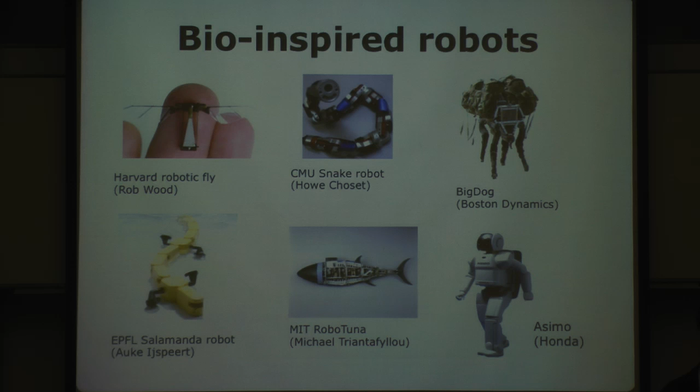As you can see, many different exciting robots are out there, developed for many different domains. What I'm wondering, though, is every robot has their own applications and features and all that, but what I'm questioning is how do they even design or get to that point? As a spectator you think, wow, that looks like a fly, that looks like a snake, that looks like a dog. Well, that's not really how bio-inspired robots happen, right? I want to make something that looks like a cockroach and make it look like a cockroach—that's not really what's happening.

So I'm diving into the deep philosophical side of the design process of how we actually do this. In order to do that, you have to understand the biology and the mechanical system. I'm not going to talk about all the biological stuff, but the one thing I want to talk about is: we look at a cheetah and think, wow, that must be designed for running really fast. I'm looking at every single detail—these black dots are probably good for running.

If you think about it, this design solution, going through millions of years of evolution, needed to evolve to satisfy many different constraints or requirements. Look at it like a physiological constraint—they need to keep their temperature right, they need to reproduce. Well, it would be great if I had a robot that reproduces itself, but that's not exactly what I'm looking for right now. And environment—they have to weather rain and snow, and they need to eat, digestion. You know, how much weight do we actually have just for the digestion organ.

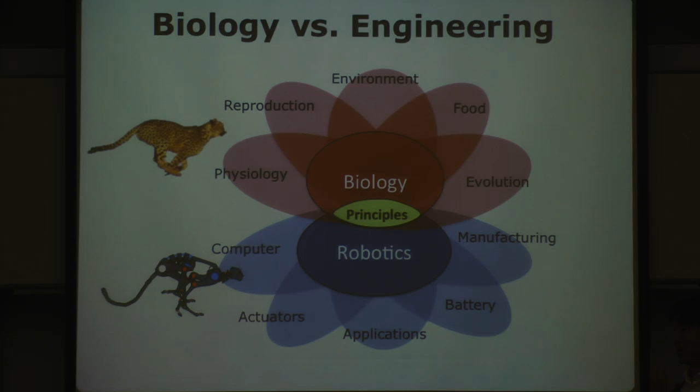So in order to really learn effectively, to use in our environment for an engineering purpose, you need to find that common principle, the physical expression that describes the behavior, and then we can learn much more effectively.

So that's the core idea, and this is the diagram I've been using. I'm going to briefly introduce it. If you want to make a robot or some mechanical system, you should have some sort of goal, and then following those objectives, we design it.

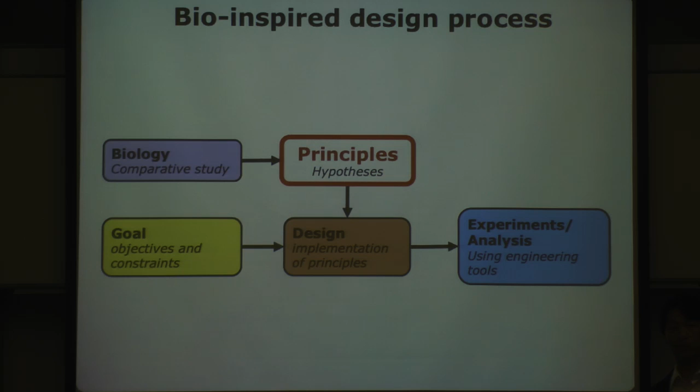Can biology play a role? I already introduced the complexity. It's not that simple. You have to go through an extracting principle process—that's the most important part of the talk—and usually those principles are extracted through hypothesizing and then doing some process I'm going to show you later.

And then you can design it, experiment, and analyze the system. For example, if you want to make a running robot, you have to look at many different running animals.

Why? Because I'm making a running robot. Cheetah is not the only animal that runs. Cockroach runs very differently. So you can get the gist of running—that is, the principle of running. Maybe this is not the only one, but this is one of them we know.

A SLIP model. This abstract representation allows us to recreate, to re-embody that philosophical abstract representation into our domain. That turns out to be very different from the animal because we go through this principle process.

And then we can measure their body center of mass trajectory and the ground reaction force, and see if our hypothesis really is valid for that behavior or not. Sometimes true, sometimes not—so you can revisit your hypothesis and refine it.

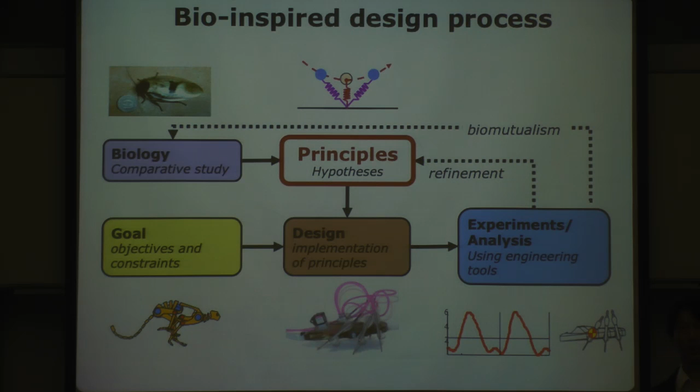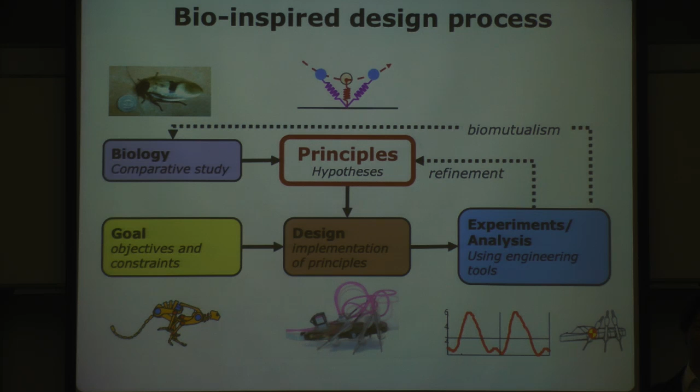Sometimes, this process is so much fun for me, especially because it actually sometimes inspires biologists. For example, Bob Full introduced in the TED Talk how engineers use a tail in a climbing robot, and biologists, who hadn't looked at it before, started looking at the tail function in the animal. They started publishing in Nature and all that. So there's some mutual inspiration going on—that's a very interesting point.

So as I explained, this complexity between these two domains—how to create a filter so you can put it through this filter and get the principle out. This is a process we're developing right now.

Not everything is structured, because I believe humans cannot be replaced by computers. Some things, computers will help with—analyzing—but I think humans still come in for understanding, finding that something is interesting, and finding that principle. So you hypothesize, simplify it into a certain model, do a lot of experiments with numerical simulation or robots, get all the data, look at it, and then you can get those principles.

So we're trying to more and more formalize this. We're writing one paper about it, and still some part is structured, some part is not. So this is the thing we're talking about.

There are many legged robotics—many people are probably familiar with the SLIP model—but this is one very good example of the principle we're seeking. The spring-loaded inverted pendulum: imagine a point mass on a spring leg hitting the ground and then jumping off.

That simple dynamical representation represents many different symmetrical running gaits, and that helps us a lot in understanding what running really is. Instead of looking at all this complex degree of freedom and measuring all the detail, we can understand it much better physically. So I want to show you a couple of examples.

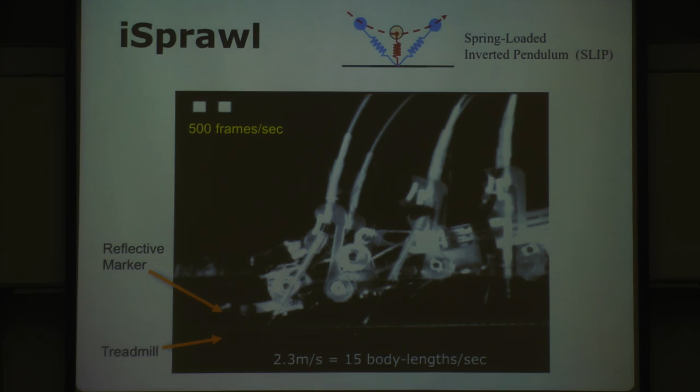This is one of the robots I first worked on, called iSprawl. We learned from the cockroach, studied it a lot, and got several principles. We implemented it, and in the end it turned out to be very different.

That's why we call this inspiration—there's no mimicry really happening. Sometimes even though you try, it doesn't work. If you want to see it at real speed, this is from about 2004. It's pretty old now, almost a 10-year-old robot.

So it does just one thing well, because that's the thing we're trying to understand. When we designed this robot, I didn't look at how the cockroach climbs or eats—we only looked at running. So we abstracted that out and implemented it in the hardware, which is why it only does running.

And then Dan Goldman took this and asked, can I try it in the sand? No, it's not going to work because it doesn't have feet. And that's how we actually got the motivation—we need to study sand.

So it actually became one of the bad examples of bad design of the foot. That actually allows us to design this robot that fast, because the legs are so thin.

Another example, this might be my favorite. I got to work on gecko adhesives. This is the best example that shows how biology provided a new perspective. It completely changed my definition of stickiness. When I think of stickiness, it's always like, oh, there's a sticky material, why is it sticky. But actually, that allows change. No, stickiness is not material property, not necessarily. It's actually the overall effective stiffness that matters.

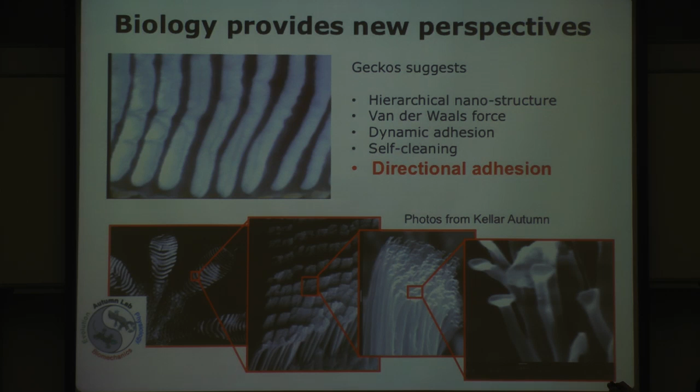There's a lot more going on. It doesn't get dirty, ironically. And it sticks while it's dragging along. That's also counterintuitive - if it's magnetic, yeah, that's fine, but what if it's sticky? You're sliding and it still sticks.

Finally, directional adhesion is another thing we found very counterintuitive and very effective for climbing. That's how we got the climbing robot working. This is data from Kellar Autumn - he dragged a seta and rubbed it against a surface, and there's a lot of adhesion. If you do the opposite way, there's almost no adhesion. That was a very important principle we had to learn from gecko.

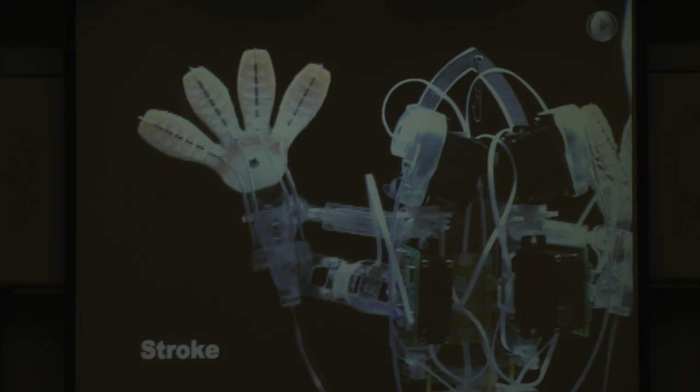So this was 2006, this was my major PhD work. There's a lot of fingers that look like a gecko - I think that was just more of a mechanical design aspect. But the most important thing in StickyBot is actually the principles for climbing, which we talked about in the paper. I want to just talk about the directionality side.

This is a real gecko seta, and it comes out at 45 degrees and then curves in. The tips of these nanoscale hairs are also aligned at an angle. Our hypothesis was this angle probably provides this directionality, because if you drag along, it can conform. If you remove that force, they want to come back, so they detach by themselves. So how can we create that principle alone?

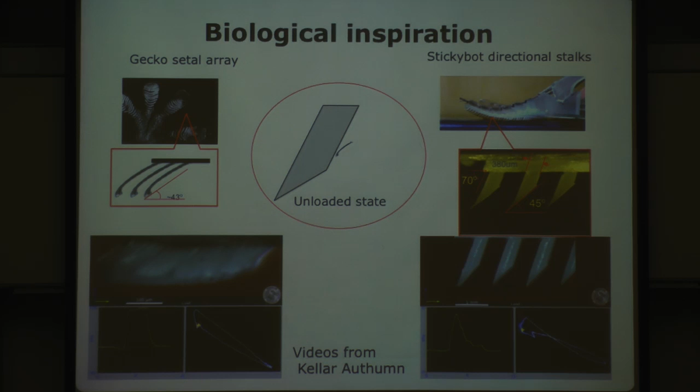We created a much simpler, much bigger, cruder version of our hair. If you look at real scale, it's actually worse than this - our hairs are about 100 to 1,000 times bigger. This video will show a real gecko versus our hair. Real geckos slide and still maintain adhesion; ours cannot, because ours are too big and attach, the frequency isn't fast enough, we have too much hysteresis. But the idea is, again, a good example of how we create similar behavior by abstracting the principle and creating the right effective stiffness to achieve adhesion.

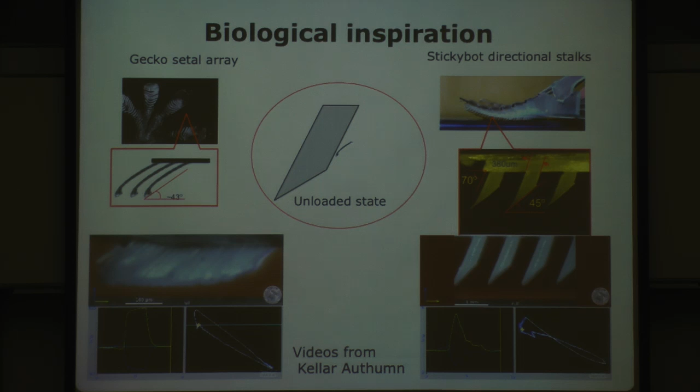This is a very old demonstration video showing what I mean by directionality. You don't need to push hard, which is important for climbing. Once you take out the tangential forces, it comes off - you don't need to peel it off like with regular carpet tape. It doesn't stick unless you apply pressure, that's why it's called pressure-sensitive adhesive, and then you need a lot of force to detach. Our tape doesn't need that, and it doesn't work the other way. That's all about stress concentration in mechanical materials mechanics.

That's still a hypothesis because we couldn't even prove it. Now we try a little more - 7 kilogram aluminum. I was a little careful, you don't need to push hard, but I was scared because if I dropped it, it might fall on my feet. But look at this - our glass isn't even moving, you can see the reflections stay perfectly the same when I'm taking it off, because the detachment force becomes really zero even though it's holding.

Kellar Autumn, the gecko guy who studied all this, got excited and asked, can I bring my daughter and hang her? He actually asked me, can I be hung? I said no, you're too heavy, the glass might shatter. But again, once she's up, because the adhesion force is proportional to tangential force, I can just take her out with my pinky, or blow air and it can come off. So it changed the complete concept of what adhesive means.

This is another small example I just showed you because it's fun. We had a squishy robot project, and I looked at the muscle structure where earthworms squish in the radial direction, then extend longitudinally. The longitudinal muscle contracts, and you can expand radially.

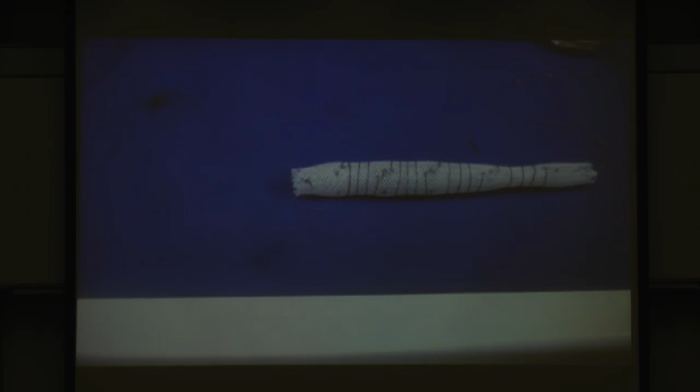So we put together a similar kind of structure, not using incompressible fluid, but using a mesh like the kind used in cable management. We made an SMA-based soft robot. It was fun, and it demonstrates that we can actually make soft systems with no mechanical rigid component that breaks upon impact.

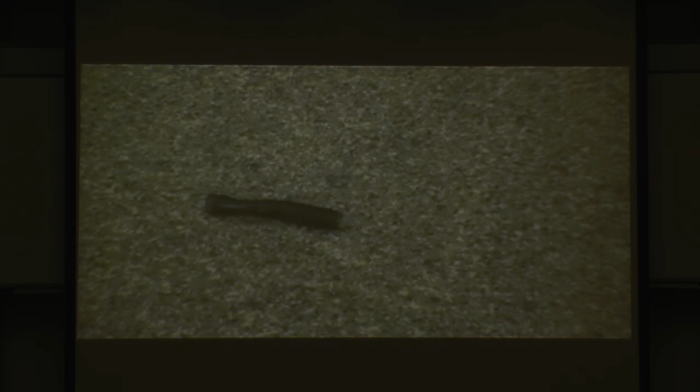Everything is made of fiber except the electronics. Some people ask, why are your electronics so strong? Well, those are just PCB and silicon. My student was crushing it, and it still works, because nothing really breaks.

Anyway, I think we'll move on because there's a lot to talk about. The final topic is Cheetah, obviously, so the rest of my talk will be all about Cheetah. This video, every time I give this talk, I have to watch it, but it still excites me. The gazelle is like a background animal. They're similar size, they're both mammals, yet somehow very different.

This video, I think, drew a lot of people's attention. I've been showing it for about 4 years. This is the only video available in the world, so there's no data we can collect, and a lot of hypotheses have been thrown into this.

Why do they whip the tail when changing direction? A lot of people say the tail's probably helping balance. I'm not really sure I'd call that balancing. That's actually about how to fall as fast as possible, how to change direction as fast as possible.

This is another impressive video, where a cheetah hunts an animal bigger than itself, tumbles it over, and is now happy. If you make a robot like that, I'd probably start from scratch rather than adapt something existing.

If you make a very dynamic robot, you have to really think about many things. You have to make it light, powerful, and robust. It's a daunting task. We started back in 2009. I began drawing in SolidWorks, and our goal was fast galloping, energy-efficient locomotion, turning, and jumping.

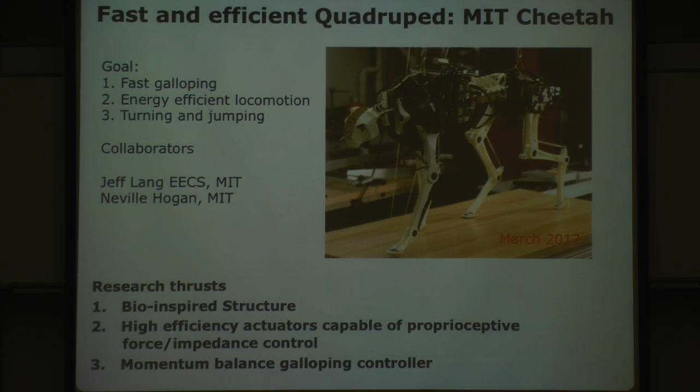So we started walking and then started running. Most of the time over the last 2 years, we spent implementing our controller and real-time hardware. Real-time hardware—I didn't have much experience with it, so that took a long time.

Before talking about detailed designs and actuators, I want to introduce energy efficiency, because that's one thing I want to emphasize in this talk. Efficiency in locomotion is not quite the same as the generic definition of efficiency in machines. Your machine efficiency is usually defined by how much energy you got in versus how much work you did—that ratio is efficiency. In a locomotion system, there's no such rigorous thing.

That's why we don't say a certain car is 97% efficient, or my Corolla is 95% efficient—we don't call it that. We call it mileage, because your energy input is always something like how much fuel or battery I consume, but what is my work output? If I draw a system boundary around myself, I start here, I walk home, my potential energy is the same, my kinetic energy is the same—I didn't do any work. I got a little warmer maybe, heated up the air a tiny bit, but I didn't do any real work.

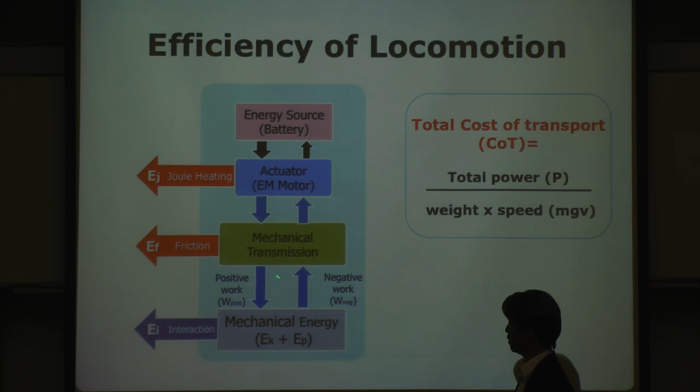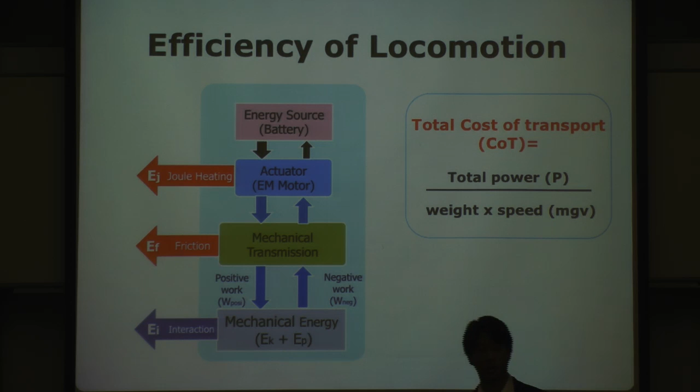And finally, you get into interacting with the ground. Now we have a slightly different energy loss, which I call interaction loss. I call it that because it's happening at the boundary of the system—my foot sliding on the ground, friction force times distance, energy loss. Air drag is all happening at the surface area. Impact loss, and then the ground is vibrating, my leg is vibrating.

So it's all happening at the same time, which is why I call it slightly differently. I'm going to talk about how we minimize this energy loss through finding principles. How can I minimize this energy loss?

By the way, this is not from biology, because I'm just looking at the mechanical system. Using these principles, I implement detail parts of our robot. I'm going to talk about most of these.

With that very flimsy-looking leg, are they made out of some special material? They're made out of bones and tendons—about 4 times weaker than aluminum, about 20 times weaker than Kevlar. We have much better materials: steel, carbon fiber. Yet somehow we cannot make a robot like this.

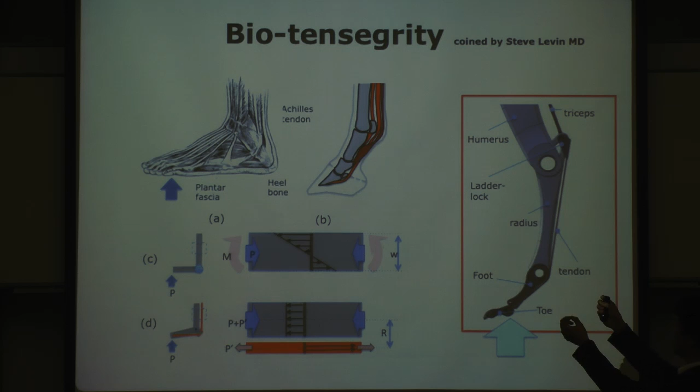But I look at the human foot, and it's awfully complex. How can I even think about implanting a strain gauge here, a strain gauge there, to measure it? So okay, let's get rid of all the small stuff, and focus on the things that probably matter most.

Their bones are actually multi-segmented. You know how many bones are in your hands—very similar to your feet. They cannot take bending moment because they're not even one piece. There are a lot of ligaments holding these bones together—it's almost like they're wrapped around the bones. Their biggest tendon, the ligament here, is the plantar fascia.

If you imagine applying force, these bones probably take mostly compression, and this part probably takes tension. How about here? It's almost the same—if you apply force here, this part will take moment, but the bone can take all the compression, and the tendon takes all the tension.

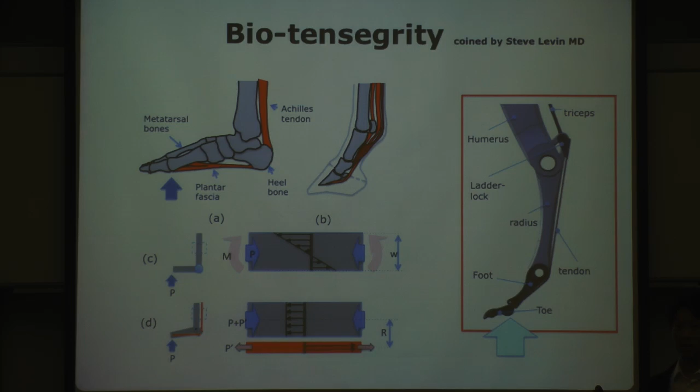If I draw a very simplified version, you can imagine it like this—a typical bending stress diagram if you apply force. If you wrap tension material around the leg, you can actually decouple, not all the time, but decouple the compression and tension completely. Why is that helpful? Because I can minimize the stress concentration on the surface.

So we tested this—we designed a robot like that, ran FEA, and then experimented. They matched pretty well, and by adding one Kevlar tendon, I saved 5 times the stress, because it is a stress concentration. Bending stresses aren't usually considered a stress concentration, but I start seeing them as one. You can add 20 grams of material and save 5 times the stress.

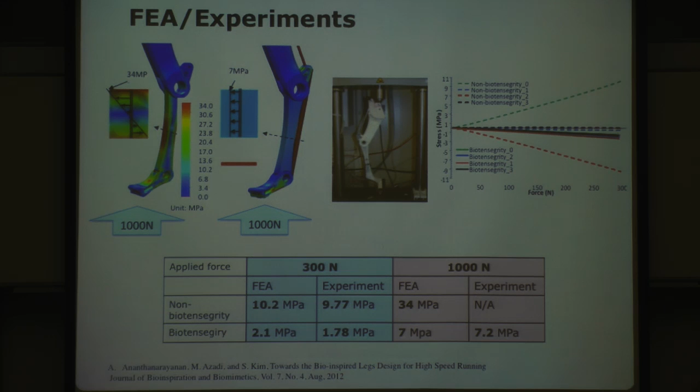Well, this is not really a generalized method yet—we just showed one case, and it only works in this configuration. But it gives us insight: maybe animals are designed to really minimize bending stress on a bone, because bones are precious.

Another thing we did for structure, we really try to minimize the inertia of the leg because you have to move the leg as quick as possible. That determines your bandwidth of the leg and the speed of the leg. And that's very well observed in the animal too. If you look at horses, the muscles are all up there. There's almost no muscle below the body line, and they're all ligaments and tendons that act as springs.

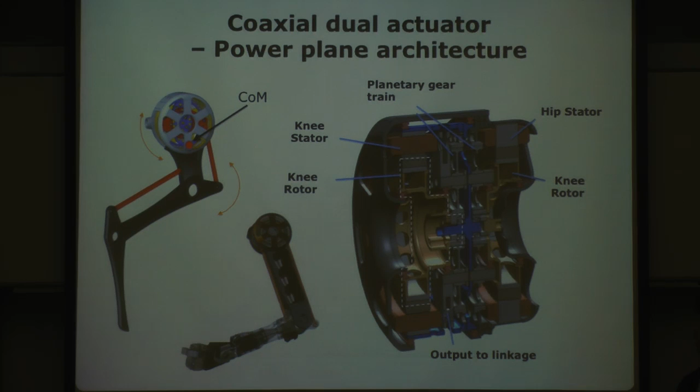So we put 2 motors and 2 gearboxes in one module, and that allows us to have a center of mass inside the circle. So I can bring my leg and put it sideways. It will stand sideways. That actually really helps and increases the bandwidth. So our leg can shake at 85 hertz. Mechanical bandwidth is close to 100 hertz.

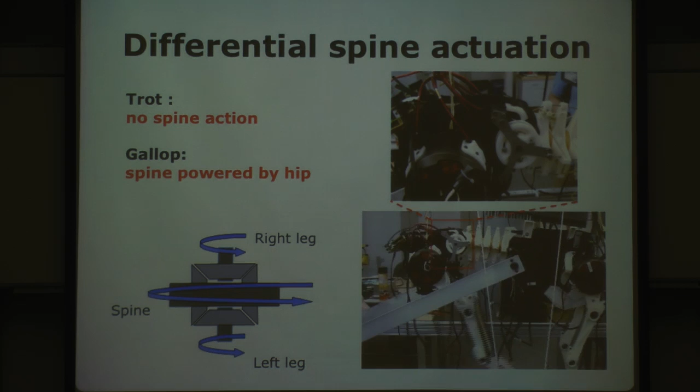So we don't know exactly how it works, but we might be able to show pretty soon.

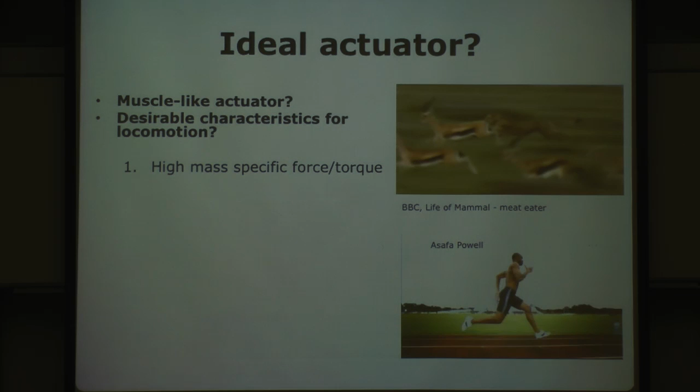So let's talk about actuators. This is probably my favorite topic. We love to see our mechanical system can do this - not just for fun. We can actually save people, travel faster, and eventually we might be able to ride it. That could be the next transportation. I'll show you - many people say, well, really? But I'll show you why I'm thinking like that.

So I was thinking about what kind of actuator do we need. Many people say our actuator is not good enough, I want to develop artificial muscle. But what characteristics, to begin with, do we need to develop this kind of behavior? We need high force density, high torque density, obviously, and we need high power. So I'm just throwing out whatever I think we need.

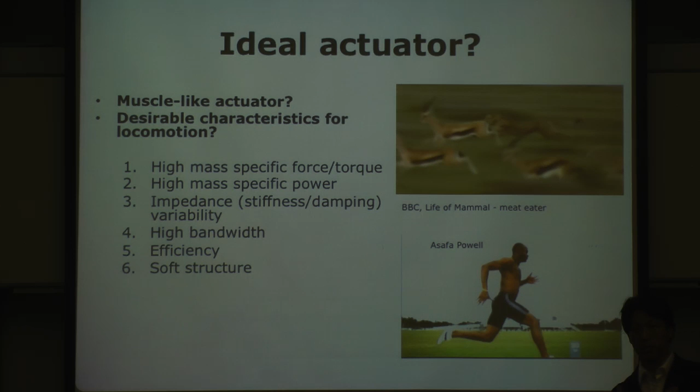It would be great if we can create those in soft structures so we can protect our body. Our muscles are not only just activating - when you fall, they protect our bones, and also allow us to design in a much more flexible way. So I started studying motors 4 years ago.

So what is really the limitation? I started looking at literature to see how powerful the muscles are. The numbers vary so much because everybody tests differently. The best number I saw was 300 watts per kilogram, which was kind of extreme, kind of an outlier. Most numbers I saw were like 80 watts per kilogram, 100 watts per kilogram. We don't even know if that's a physiologically sustainable number.

Then I started looking at motor power, looking at maximum motor charts from all the famous motor companies - it's about 300 watts per kilogram or a little less. And then I found other motor companies running high speed. For example, ThinGap motors, they're making new ones at 11 kilowatts per kilogram. Tesla motors, they say their motor can easily be 7 kilowatts per kilogram. I looked at helicopter motors, they easily achieve 2-3 kilowatts per kilogram.

What's going on here? Like 2 orders of magnitude difference between electromagnetic actuators and our magic dream human muscle. Why can't we make our robot jump up 10 meters high and run 10 times faster than me, flying or swimming, whatever? We can exceed animals by at least an order of magnitude better than right now. Anybody have any idea why we cannot, even though we have such a high power actuator, achieve those things? Our control is bad - many people say that. I agree, we are working on it. It's not that simple question, it's actually quite tricky.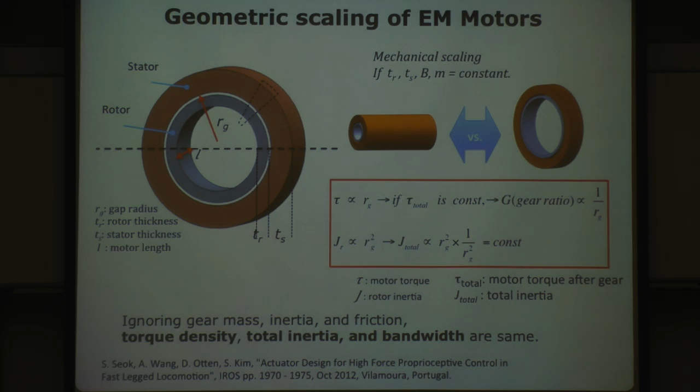So we propose a new paradigm—I'm not even sure if I can still call it new, because haptic devices are designed this way.

This is a typical manufacturing robot. They want it to be as stiff as possible. If you want to do force control, I need a force sensor, but those have to be even stiffer to get the right torque. Now what's the problem?

If you have an impact, like a cheetah running, right—your impact force travels. Some people might get confused by what I mean by force travel. The wave travels; the molecular force in between, any force, you have to think about those molecules hitting and pushing each other. That force travels at the speed of sound, and if it's steel, yes.

If it's aluminum, the speed of sound in aluminum—how fast can it travel? Very, very fast. No matter how fast you close the loop, even though you close the loop in time, your motor cannot even respond because your motor bandwidth is so low. So you cannot handle impact in theory here, even though you ignore gear frictions.

So people start using series elastic actuators. It's popular—if you go to a robotics conference, everybody's using it because it can handle impact, and now you can measure force by measuring this deflection. It's a great idea.

You can make efficiency higher. I'm a little hesitant about the complexity of the gearbox, the efficiency of the gearbox, and then needing to change the stiffness also. So we propose: if you design a motor properly, and minimize the gear ratio, gear inertia, and gear friction, I can actually achieve everything.

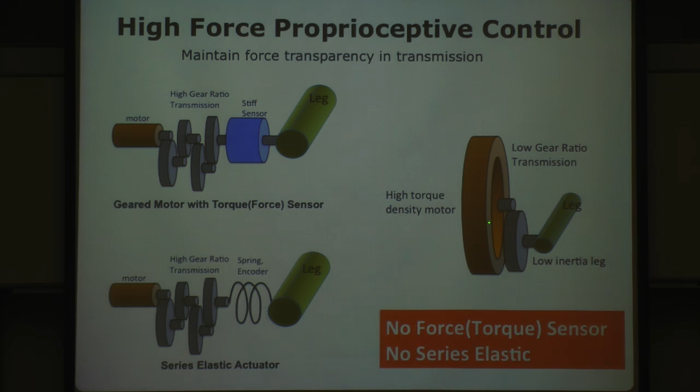If I have an impact, of course the impact travels at the speed of sound, but there's nothing holding onto it—very little inertia and friction going on. So I will show you what I mean by that.

That's when our Cheetah is turned off—that's minimum inertia, so I don't mind hitting it, hammering it. There's travel, there's shock, but it's so little because there's nothing backing on it. So now you can get much more dynamic behavior without requiring even a spring or force sensor.

You can make the robot behave as if I'm doing force control, but this is just position control. Many people learn control in a kind of different way—position control and force control separately. But this is just position control.

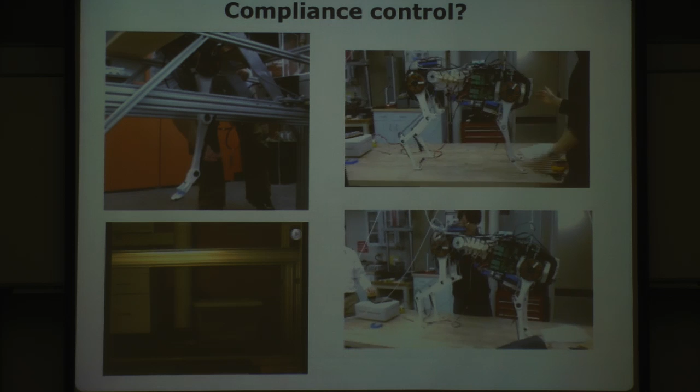I'm just commanding PD in joint space, and you can achieve any compliant behavior because our inertia is very low to begin with. This is all true from haptic devices—actually done 20 years ago, but somehow it never transmitted to real high-power robotic systems.

We created this video just to translate this idea. This is how you're supposed to build a robot if you want to do dynamic system, dynamic applications.

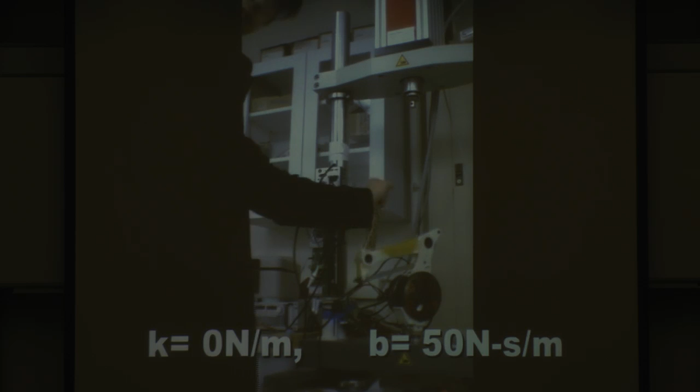So we set the virtual stiffness. We cannot do research without a hammer, we have to have a hammer. There's no stiffness and the high damping.

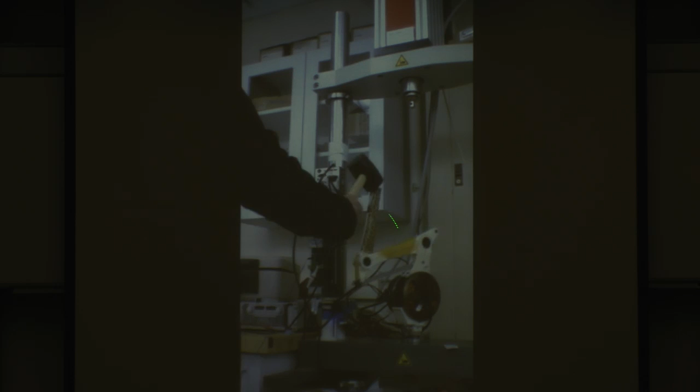This I can change in 1 millisecond. So it depends on how fast I'm closing the loop. 4 kilohertz is no problem, and I can create whatever nonlinear, step, or deadband programmable impedance to begin with. And then I can combine it into a shock absorber.

Our legs are a little too compliant. We're trying to make it stiffer so that it doesn't have an internal vibration. Then we can crank it up to a level that it becomes like a sculpture, become a rock. Now we can actually achieve, without going unstable, twice of this, and then 4 times of this. So now it becomes like a plastic that's bending.

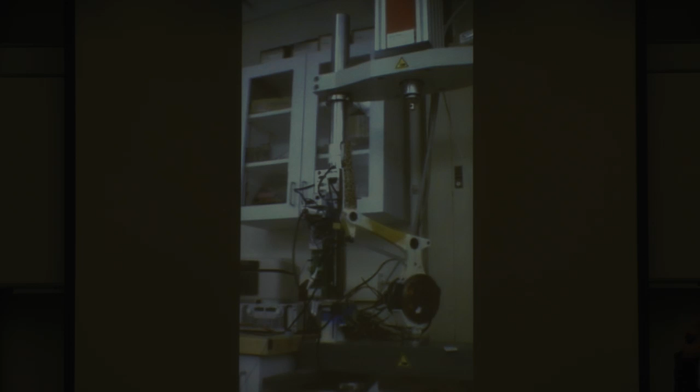That was a commercial motor, and that doesn't satisfy our peak torque needs. Jeff Lang is a professor in the EE department collaborating with us. He designed a new motor which exceeds existing technology quite a bit. Weight is 30% lighter, motor constant is almost twice.

This is torque divided by I squared, so how much heat I need to generate that torque is much better. Maximum torque is about 3 times because there are multiple design aspects optimized. So our new Cheetah is designed that way, and we're excited about it.

Another advantage of having low impedance is you can actually regenerate power, which is obvious if you think about any electric cars. In this particular case, we drop the leg and measure how much power is going this direction, that direction. The measurement is pretty accurate.

One is measured from the battery, and one is from all the drivers, and they match pretty well. About 53% of energy is recovered. The rest is burned through the I squared R.

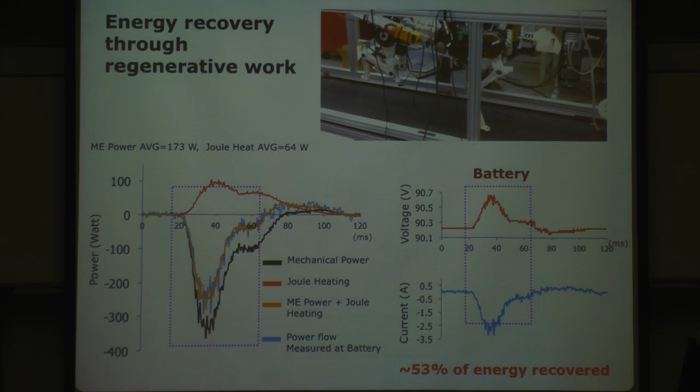It's not as good as a spring, but the thing is we have all the controllability. So damping, the word damping, actually means dissipating, but in our case that's not really true. We have a lot of damping that hits and then does negative work.

Actually, quite a number of percentages go back to the battery. It depends, so we don't know what word should I use. Damping sounds like it's dissipating, but actually it's not in this case.

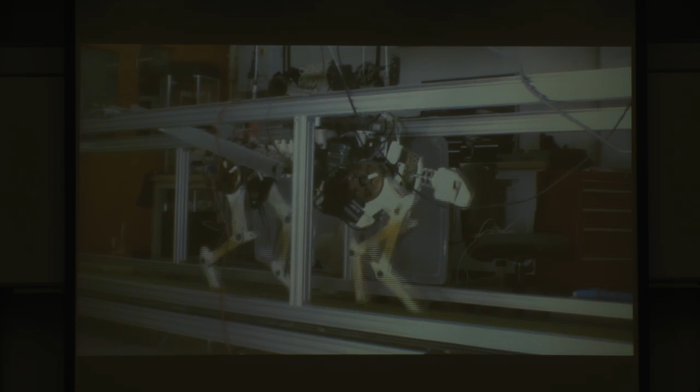So this is from last May. We've been kind of delayed. We'd love to try a new gait and a new robot. You can see the Cheetah 2 over there.

It's not yet so impressive running, but this is limited by the treadmill. This is a 2,000 dollar treadmill from Sole. We cut it in half and made it longer, bought a longer belt, and the motor's not powerful enough. So we tried to change the gait from the trot to gallop, and the controller wasn't even ready. It was just tried out of our curiosity.

So you can see it a little better in slow motion, and you see the phase shifting and becoming like a gallop. It looks great in the first steps, and we don't do any pitch measurement or even change the trajectory. You should at least change the front leg and rear leg differently, since the function of the front leg and rear leg is quite different in this particular gait.

Anyway, we couldn't achieve the maximum, we couldn't try what the maximum speed is, but it gave us quite a bit of important information. Peak power of the 8 motors, all 8 motors, electric power was only 3 kilowatts. Wow, 3 kilowatts is a lot, but if you divide it by 8, it's not that much. Average power is only 900 watts, and if you divide that by 8, each motor is only consuming a little bit over 100 watts.

Still, surprisingly, Joule heating is 76%. And probably not true in many other robots, but probably compensated by the transmission loss. The mechanical power is pretty low, but the cost of transport is actually pretty good.

With the 3 kilogram battery, about this big, we have a dummy mass on the robot, you can run about 10 kilometers or 6 miles. With the new motor, if I replace the motor, the drop is much more significant. We can double the distance.

So if you think about Joule heating divided by 8, each motor is only burning about 100 watts, so it can run several minutes. If you drop the speed to about 4 meters per second, it actually ran. We tried to run about 20 minutes because the department wanted to take a video, so okay, keep on running. We broke some bearings, but the motor was fine.

So this is actually very interesting data. Sorry, 0.27, is that correct? This is estimated.

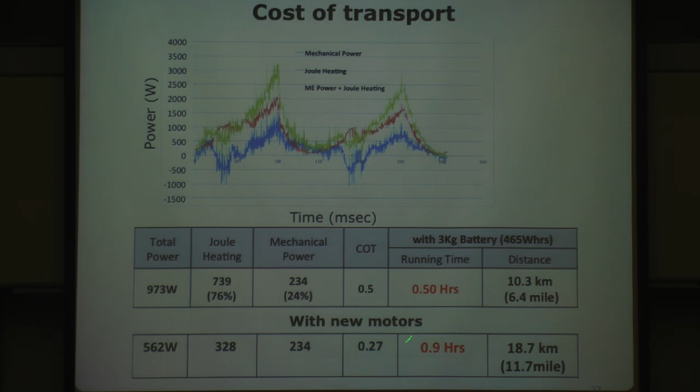This is estimated, yeah. Because we know what, if you run exactly the same way, I know the torque constant, so I can estimate. So we're trying to get this. So this is interesting data.

So cost of transport is a function of speed. In the beginning, it's probably like walking awkward, so it's not very good. At speed 1, it's not too terrible, but it's not good. But there's a significant drop. The gradient is pretty steep here. That's actually a very interesting part.

And then that kind of corresponds to these bumps. What do you mean by this bump? This is power to speed. How come power reduced as speed goes up?

And this is where the Froude number is about 1. What do you mean by Froude number 1 is your centrifugal force. If my leg is a strut, and if this center mass is a point mass, you can imagine like throwing something on the ground, and at this speed, your centrifugal force is the same as your gravitational force. You can't stay in contact. You cannot walk at this speed.

So that's where most animals or people transition to gait and running. Most animals run either lower than 1 or higher than 1 Froude number. They don't like to be around 1 because it's very hard. And then that seems like it's matching really well with our Froude number 1, this speed. After that, it got better, and cost of transport drops a lot.

More interesting thing is they actually never got back up, it's still going down. And if you compare with the horse, it's about at least 1.5 times bigger than our cheetah. Weight is like 10 times, maybe 100 times bigger. They actually already gallop here.

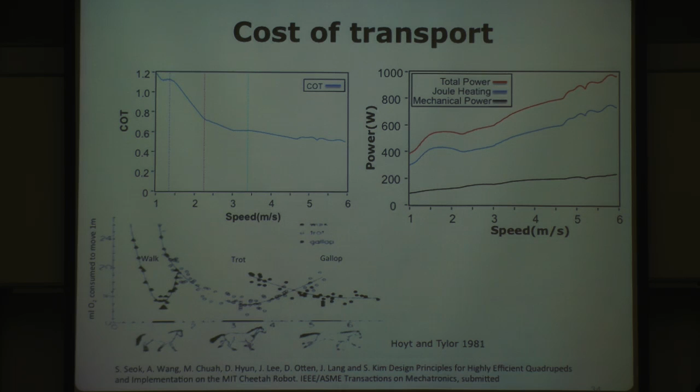I can tell you, for example, muscles are very picky. If our muscles are stretched, your force is very low, getting stronger, stronger, stronger, and then getting weaker, weaker, weaker. So your force is dependent on the position. And if I move fast, your force drops significantly. So you have this constraint.

Imagine you're running back and forth. You need to swing the arm, swing the leg back and forth. This is the time you need to get the maximum acceleration. That's the time these muscles are stretched. You cannot generate high force.

That's why you see this unnatural behavior where our efficiency is still very good. So you have to really understand what the core technologies are that differ between animal and robot, and then we can refine what can do even better than animal.

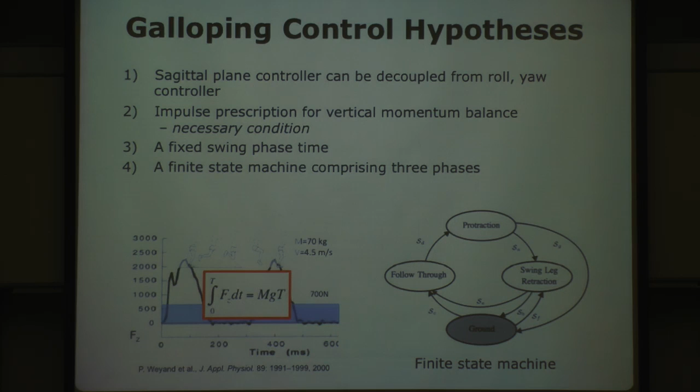And we built our finite state machine based on our intuition: we need to protract, we need some swing leg retraction phase to match the speed, and then follow through. Those are the basic assumptions of this galloping control. This is the equation I'm talking about—it doesn't guarantee anything, it's just a necessary condition, not a sufficient one, so we need to add more. But this is what we get. This has been about a year now, waiting to be implemented.

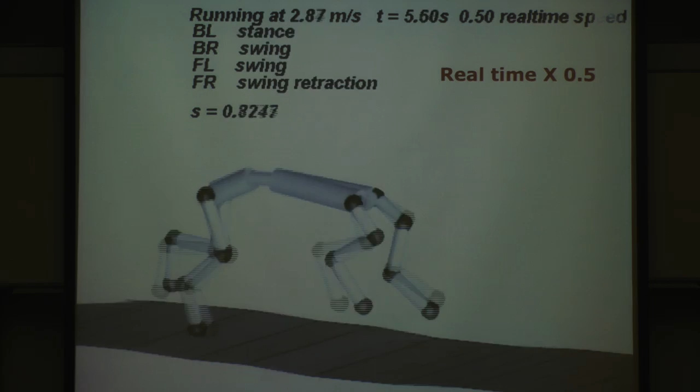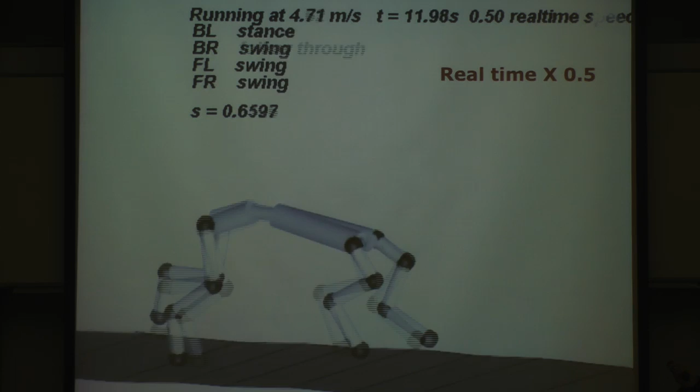So we changed the gait and accelerated up to 5 meters per second. Changing gait was just hand-tuning the gait and going down the steps, and it's pretty robust on continuous rough terrain. So I want to briefly explain this process.

We model an 11-degree-of-freedom cheetah, and then we optimize to create a limit cycle. Limit cycle means I start at this position and then come back to the same position. If you find that trajectory, you can just repeat it without guaranteeing your stability, at 3 meters per second.

And these are the optimizing parameters. There are quite a number of parameters, I think it was 60 or something. And then once you get the limit cycle, now we need to make it stable.

So what we did is convert all the control parameters that are a function of time into a function of state, because time is bad — if something drifts, it's not going to match. And we add impedance around our desired trajectory, because momentum balance doesn't guarantee your position, it guarantees velocity. Even if you get it right, we don't know if our robot can actually do it.

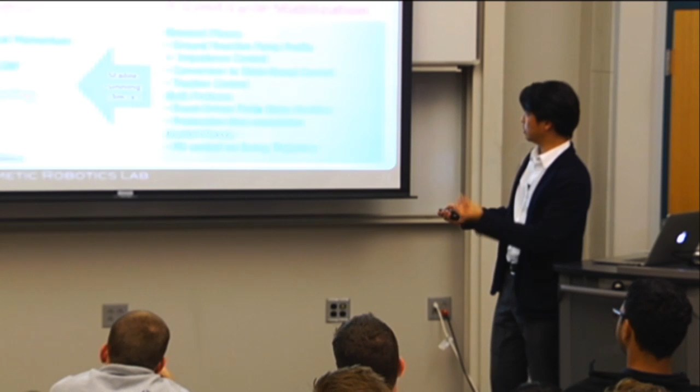And there's a pattern stabilization algorithm, and then there's a speed control algorithm. So we make 3 meters per second very, very stable.

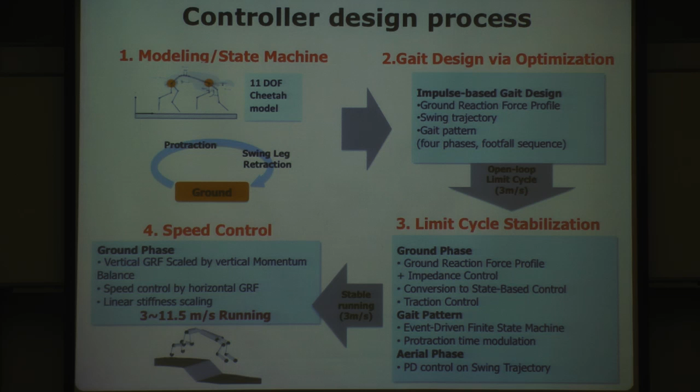And what we did to go faster — instead of optimizing for 4, 5, 6 meters per second separately, which is too much hassle — we actually change only the ground reaction force profile following momentum balance. And then we try the same optimization and stabilization algorithm, only changing this, and achieve 11.5 meters per second, no problem. So that's what we're showing here.

So we only did optimization once to find the limit cycle, and then have a stabilization mechanism, and then by changing this momentum-based force profile prescription, we achieve a pretty impressive result.

If anybody's interested in cheetah-like gallop or horse-like gallop, there are many different types of gallop. I'd love to talk about it, but that's just for those who are interested.

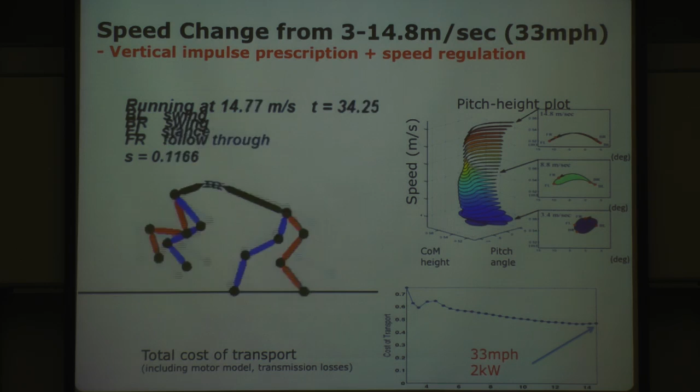According to simulation — of course simulation is not perfect — at 33 miles per hour our robot will consume only 2 kilowatts. I think that will be almost the same level, well we don't know, it's actually almost the same as an animal, but pretty impressive cost of transport for that speed.

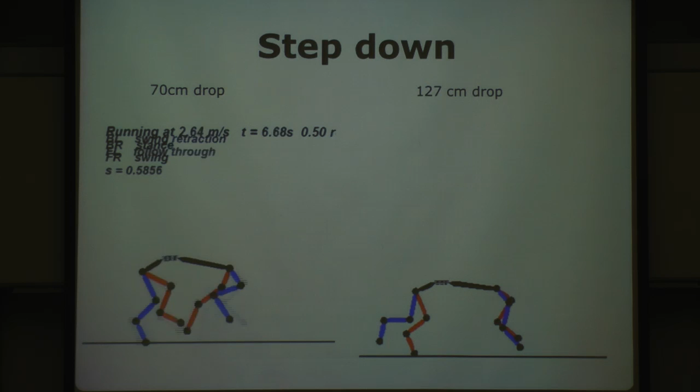And then we're using exactly the same algorithm without knowing the height. It achieves a 70 centimeter drop and a 127 centimeter drop. This is point data, it doesn't really mean it covers all the height drops here, but it's pretty impressive. I think around less than 80 centimeter drop there was no problem using the same algorithm.

And now we combine it. So some simple capture point idea — can we combine that algorithm into 3D?

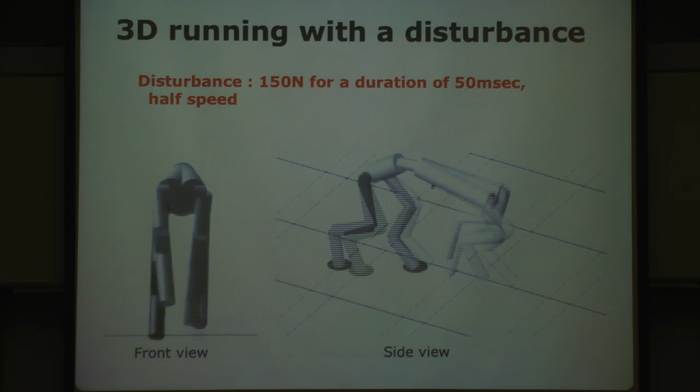So we're waiting for that algorithm to implement here.

We have a lot of discussion about what kind of computer we're going to use. That surprisingly is a bottleneck for us. The reason is our leg can shake at 100 hertz, which means the loop time should be much, much shorter, and that caused a lot of trouble. We use FPGA significantly, and FPGA is hard to redesign and recode. So we are shuffling around the idea — that's why the delay is going on, but hopefully we can get that pretty soon.

Before going to the end, I want to show you something fun. I think a lot of people have seen this one, but there's a reason why I'm showing this.

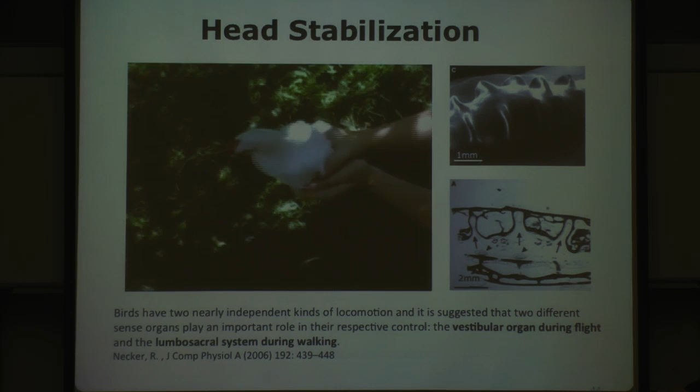This video has bugged me for several years. Even though I'm not a control expert, this didn't make sense. With that slow feedback loop — maybe a chicken is faster than a human, but animals are the same — how can they perfectly reject the disturbance from the human, which is unexpected for the chicken?

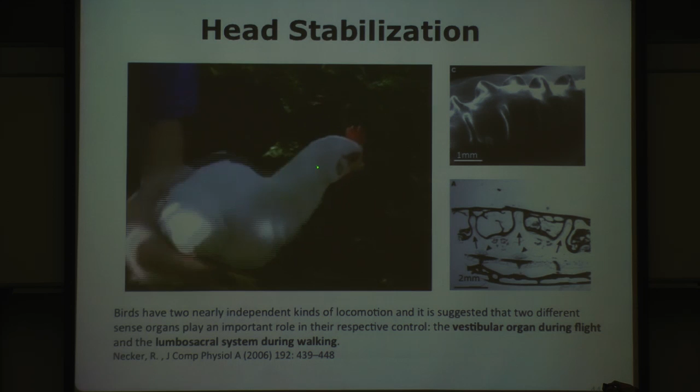They're close friends, but not that close — they don't know exactly what this guy is doing. Somehow there's no delay even; it's like a rejection from the very beginning.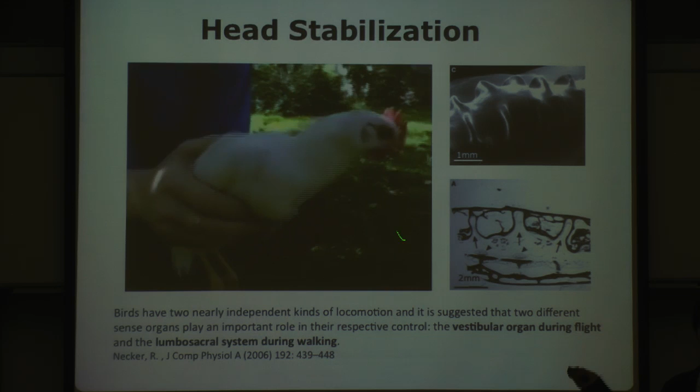And we know animals use their eyes, vestibules, and proprioception to control their balance, all that. How is it even possible?

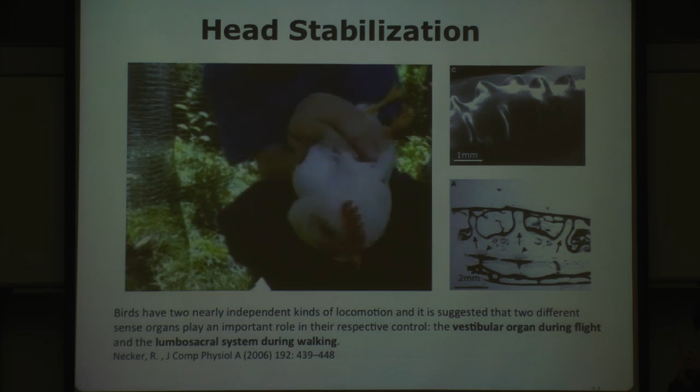I think this is actually known to biologists for a long time — there is actually an additional vestibular organ in their pelvis. In robotic terms, there's another IMU in their pelvis. I don't think humans have it, I don't think my pelvis can measure orientation, but every bird has a separate IMU in their pelvis.

And then people are speculating — I think one is mostly used for birds flying, one is for walking. I don't know, I don't think people know exactly. But that might be very useful. If I have one IMU in my cheetah's head and one IMU in my body, I might be able to stabilize my head. Now I can utilize my vision to actually augment my IMU sensing, because IMU will drift.

Inspiring, a lot of questions. So there's many other projects, old projects, new projects.

I want to show you, we are also making a printable robot and actuator. I'm focusing on actuator. Our postdoc developed this layer-based pneumatic actuator you can actually print. We're making this pattern with a CNC milling machine, heating it up, and just punching. So you can actually make an actuator in one second. You design computationally where the actuator should be in a layer of vinyl, and then you can just punch. You can make an actuator like that.

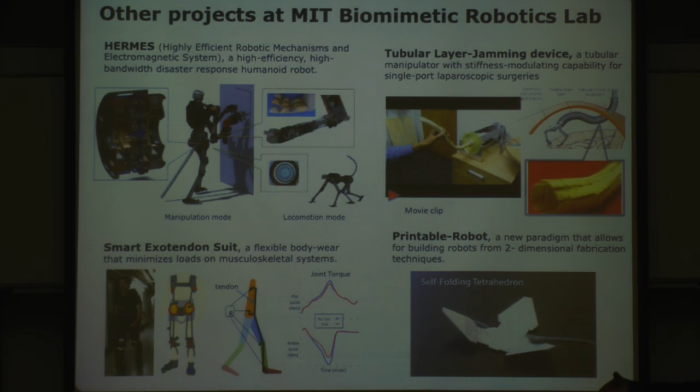We hope that we can take this layered process, get this multi-layer structure, fold it up, and then start walking and running. I wanted to show this.

This came from frustration with FPGA - God, I want to have something I can easily code. We designed this - a fantastic undergrad designed this in 2 or 3 months. The cost is about $1,000, including the treadmill. We bought a $200 treadmill, it was there. So I designed this for education.

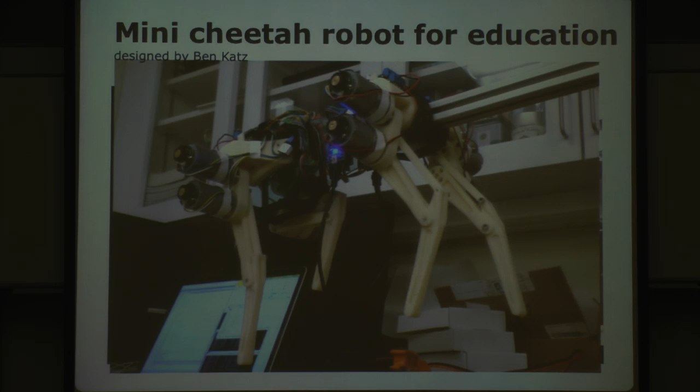Right now I'm teaching a biomechanics, bio-inspired robot class, and I give the half cheetah to every team. I have 10 teams. I don't give them all the design because they're going to pick a problem - throwing, kicking, walking, or jumping - but they have all the materials to do it. And these are $30 motors and $50 processors, and there are multiple processors. So it started walking.

I think one joint was not moving, and he didn't know that. He sent me the video, but it's strong enough.

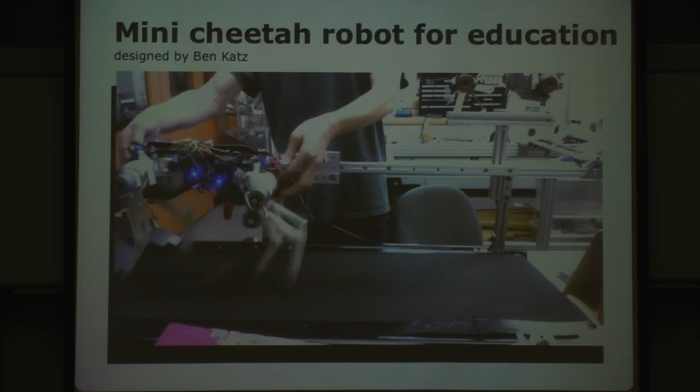If I can find this cursor - and it's cheap, it's $1,000. Not that cheap, but it's way cheaper than our Cheetah, and very, very safe. You can just use a $500 power supply, and these motors can be 3 or 4 times stronger if I change the magnets and do something.

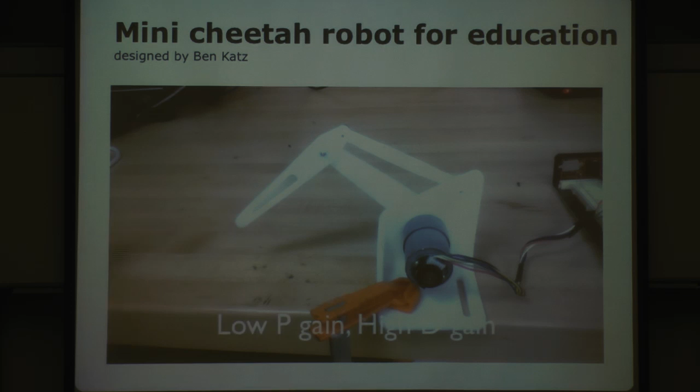And the design principle is exactly the same. We don't use a force sensor because that causes too much trouble - non-collocated sensing, instability, I don't want to deal with that. We use exactly the same torque control with our own very bad encoder. It's doable. The sensors are very noisy, the signals are very noisy, but the global mechanical dynamics is so slow that it's still good enough to do a class project. So they're going to do throwing, jumping, with the same impedance control.

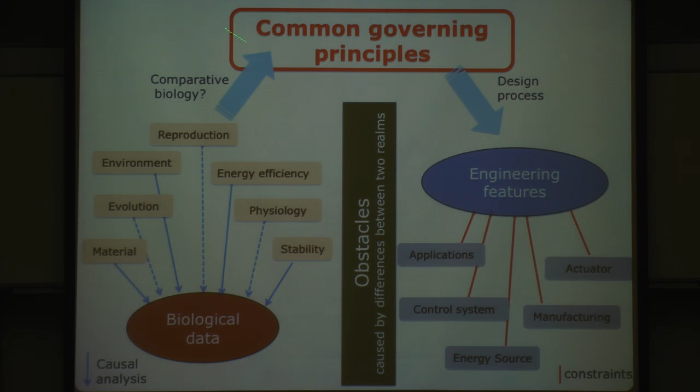Now we can do this in class. So to close the talk, we have a lot of biological data for their purpose. Biologists are still interested in how biological systems work, and we try to learn from it, but the obstacle is such a big problem. We need to cross the domain, and the technique has to go through this abstraction process and then make it happen while meeting these requirements.

That's an important message. As we did with biology, with flying machines, we learned from biology, but we got inspired - we probably wouldn't even be thinking about making planes if we hadn't seen flying animals. They give us a really new perspective, as I showed with the gecko, giving us a new idea of stickiness, defining a new way of locomotion. I think the principle is that inspiration is actually the most valuable source we have in nature.

And I want to thank the many, many people behind this video - they worked hard and stayed up all night, exploding batteries. I want to thank them, and then I'll open it up for questions. Thank you very much.

So, any questions? Yes? So we're sitting here burning about 100 watts each. If we run, probably another 100-150 watts horizontally. Running up a hill or upstairs, maybe we get to 500 watts of real work.

Possible, yes. Your Cheetah is running at 2 kilowatts or so, but the difference running upstairs should be about the same, 200 or 300 watts. Have you done it? If you tilt the treadmill for our Cheetah, that 200 watt difference in real work should be about the same as for us.

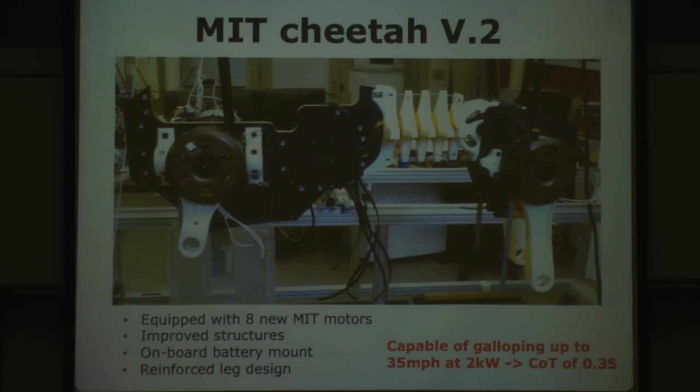Can you explain how you calculate cost of transport? I'm surprised that with higher speed you get lower cost of transport, which seems reversed. In reality, inertial work done is speed squared. So how come power is increasing while cost of transport is decreasing? Cost of transport is normalized by speed, so it can decrease if the running is better. But how can that happen?

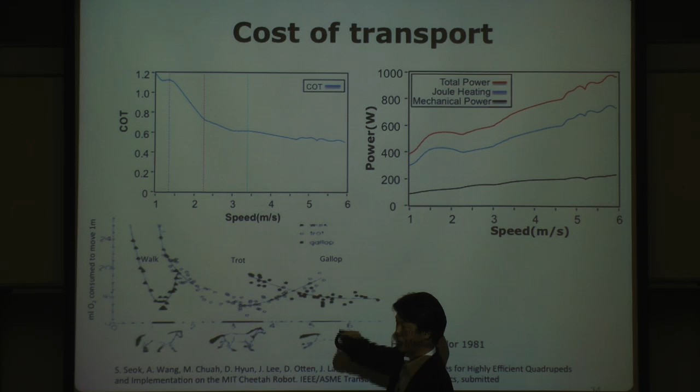In this speed range, if your speed goes up, cost of transport goes down because the dynamics handle speed better, including muscle physiology and all that. So that can happen, but typically an animal's preferred speed range is very narrow. For smaller animals this curve is flatter -- they don't care as much because gravity isn't as much of a factor. Heavier animals care more, so our cheetah probably still wants to go faster for that reason. I think it's because the center of mass fluctuation gets smaller, you do less negative and positive work, and speed isn't expensive in our electric motor world -- though in most of the world that's not true. I think that's why.

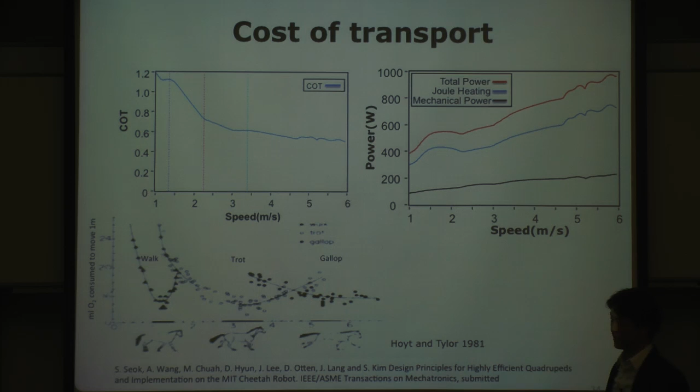You mentioned galloping -- why should you do galloping? Do you consider the spine deformation that helps a lot? I actually don't know yet, and I don't believe it helps efficiency. I believe it helps get higher speed, because you increase your stride length by extending your body more. So the main reason we have a spine is actually to find out the truth of this 30-year-long speculation -- nobody has really proved it. We designed the spine so we can fairly compare it, because we didn't add an actuator. If you add an actuator, you consume more energy faster, which isn't very interesting.

So we actually coupled it, so we can compare. But unfortunately we had a delay, so we haven't shown it yet. I think galloping might actually be much more expensive than trotting in general, because of more fluctuation.

Quick question: where can we buy these awesome new high torque density motors? The one we're using is actually commercially available -- it's an Emoteq motor. I wasn't very impressed by the peak torque, because they advertise it as 20, but we realized it's already saturating at 10. So that's what I'm saying -- I called the company asking how they could do that, and they said, well, we actually didn't test it.

Let me tell you the truth. Most companies measure the motor constant, and then they give you the current, and if that current gives a certain torque, they just extrapolate and give that number out. Many companies do that, so they don't know when the steel saturates.

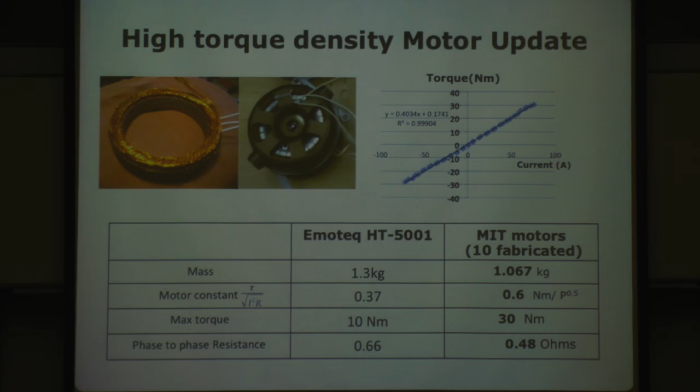We are actually developing a 6-phase motor right now. I'm a little scared because the electric complexity is an important cost. Eventually, I'd still love to develop a homopolar rotary motor. I think it's topologically impossible, but if it's possible, I'd love to do that.

So, to make it cheaper, yeah, the answer is you can buy something not as good. This one, I think, is way too expensive at this point.

We looked at central pattern generators. Central pattern generator like in animals, or for use in our robot? Yeah, for use in our robot, in our simulation. Central pattern generator is a hypothesis. I don't know what I have to compare it with.

We have a pattern generator, but I'm not really sure if we should call it a central pattern generator, because many people use different definitions. Our central computer is prescribing the pattern, so you know what I'm saying.

In the motor, you said the shorter motor was better than the longer one, and more precisely, larger radius matters—a larger radius motor. But there was an assumption that the wall thickness was always kept the same. What was the reason for that assumption?